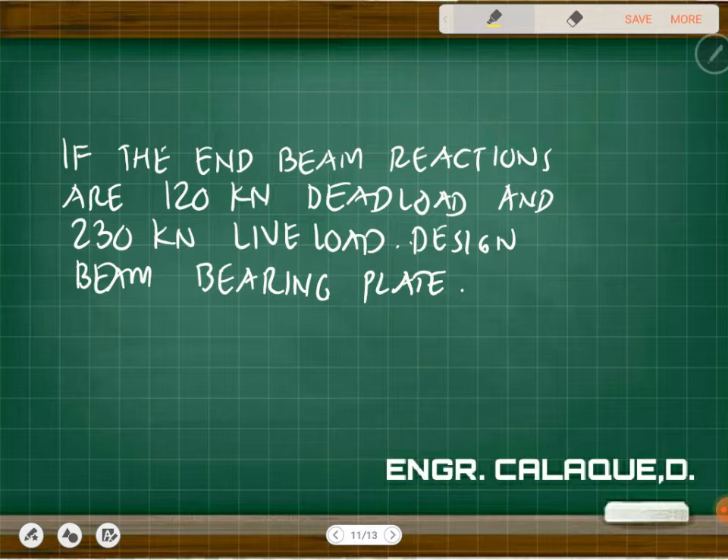So i-design lang natin yung minimum length ng bearing plate required to prevent yung web failures, web yielding tsaka web crippling. And we also need to design for the minimum width of the bearing plate required to prevent yung bearing failure on a concrete wall. And we also need to design for the minimum thickness ng bearing plate required to prevent yung excessive bending dito sa bearing plate. So anyway, yung concern natin is i-design talaga natin yung beam bearing plate.

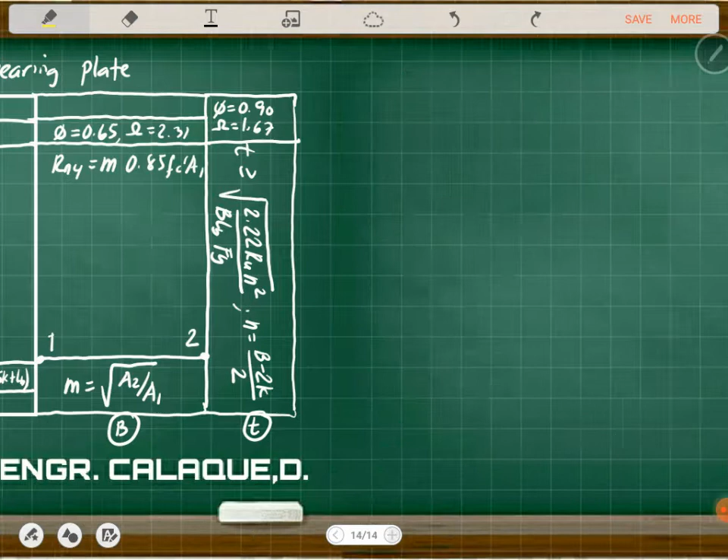0.4 tw squared, and then we have 1 plus 4 LB divided by d minus 0.2, and then we have tw over tf raised to the power of 1.5, and square root of E Fy tf over tw. Okay, so yan muna. So based ito sa LB over d greater than 0.2. So we have for LB over d greater than 0.2. So substitute natin yung mga values. So we have now Rn1.

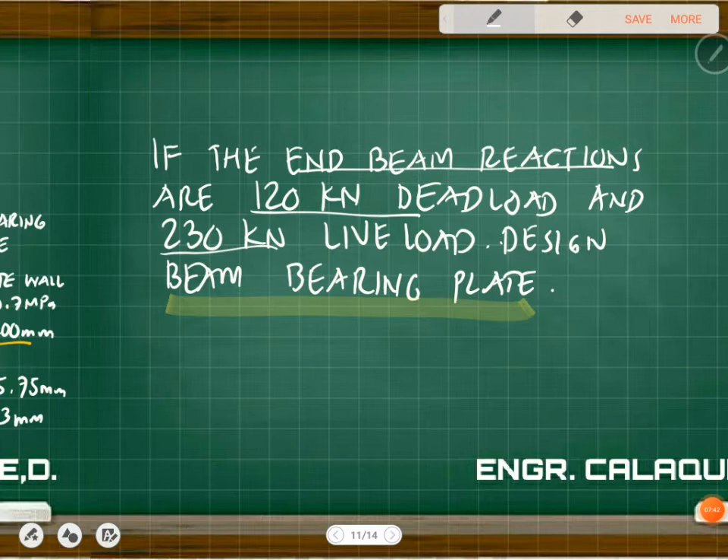So yung phi Rn must be greater than or equal to Ru. So yung phi natin dito is 0.75. So I have 0.75, and then ito yung magiging Rn1 ko. So I have 0.4 times yung tw, that is given, 11.18. So we have 11.18 squared, multiplied by 1 plus 4 LB, ito yung gusto nating makuha, over 356.11 minus 0.2, times tw, 11.18, all over yung thickness ng flange, 18.03, raised to the power of 1.5, and then square root of E.

So constant yung E, 200,000 megapascal. This is web crippling. We are considering web crippling. Yung Fy, that is also given. Grade 50, so Fy is 50 KSI, approximately equal to 345 megapascal, corresponding to the wide flange section. And then thickness ng flange, we have 18.03.

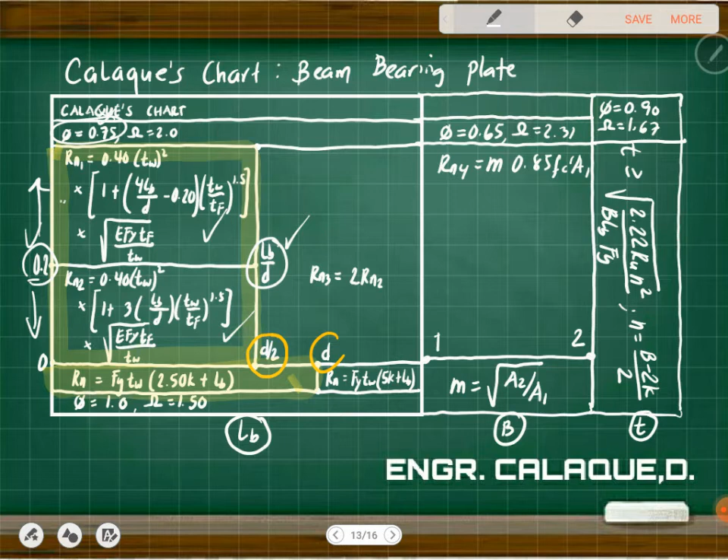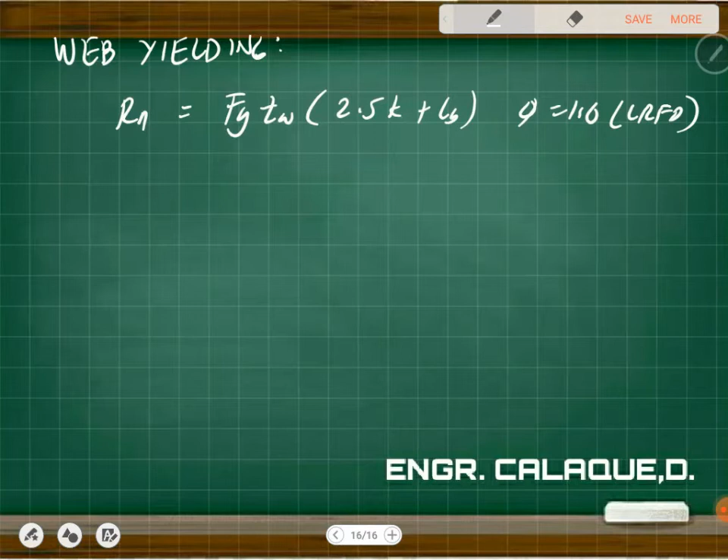So yung Rn is just equal to Fy, thickness nung web, and then we have 2.5 nung K plus LB. Okay? So yung phi is 1.0 for LRFD. Diba yan dito? Okay? So ngayon, meron na tayong phi Rn. This must be greater than or equal nung Ru, just to be safe, no? To be safe. So we have 1, and then we have Fy 345.

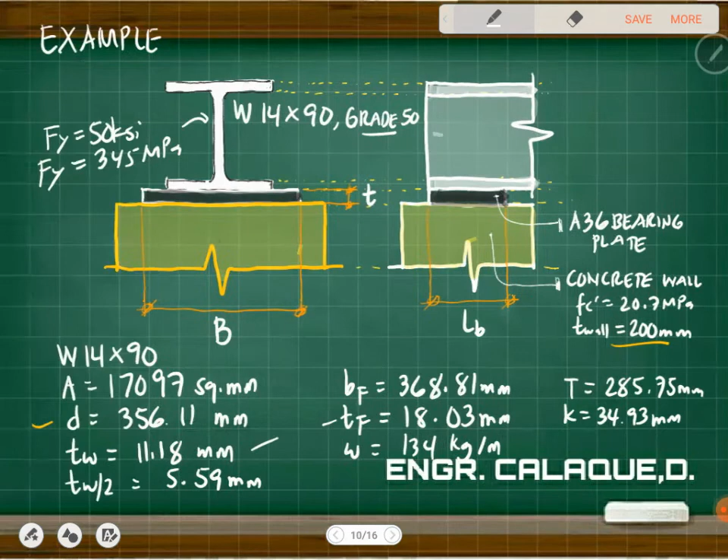Take note, we are considering web, so ito yung yield stress nung wide section natin. And then we have 11.18, and then we have 2.5. Yung K is also a property. Ito yan, 34.93. So times 34.93 plus LB, and this must be greater than or equal nung 512 times 10 to the power of 3, yung RU na compute natin. So compute natin yan, makakompute natin yung LB.

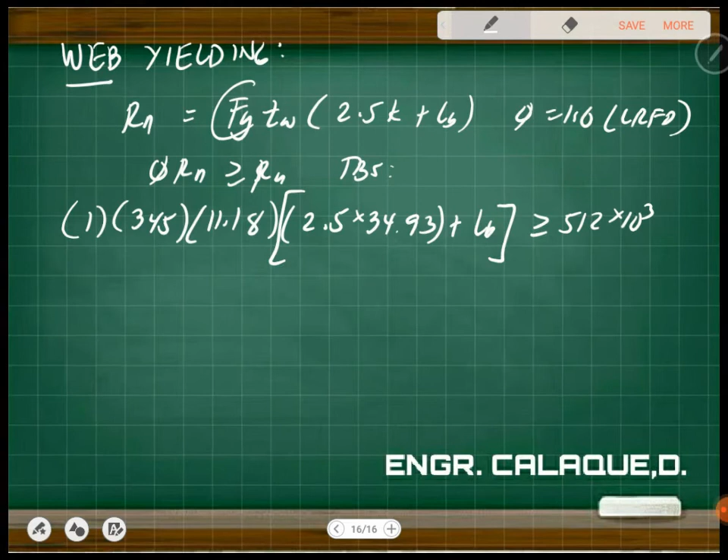So thus we have 1 times 345 times 11.18 times 2.5 times 34.93 plus x. This must be equal to 512 times 10 cube. Shift solve. We have 45.417. So yung LB is 45.417 millimeter.